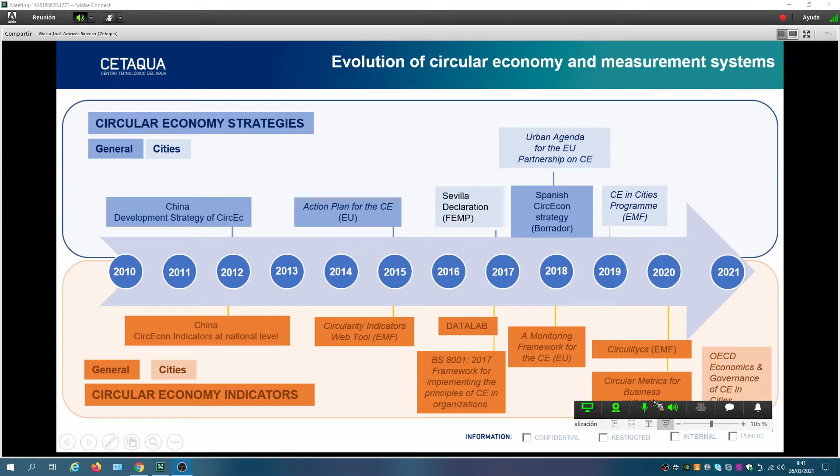And regarding indicators, there are several initiatives. We have done a very exhaustive review of the other indicators worldwide regarding circular economy indicators and tools from the Ellen MacArthur Foundation, from the China strategies, from the European monitoring frameworks, and others like the circular metrics to evaluate the cities in the context of the circular economy.

So regarding the principles and strategies, I think that everyone knows them, but I would like to refresh something about eco-design, which is very important in products to avoid design waste and pollution. Important also is all the procedure and the final management to valorize this waste and to introduce it in the cascade to try to impulse the circularity in all the processes.

So the three main topics are to design out waste and pollution, trying to optimize the amount of energy, minerals, and also the consumptive use of water; to keep products and materials in use, with the idea to optimize the energy, the resource extraction, and the value generated in all the systems, including the water systems and others connected with them; and to regenerate the natural systems.

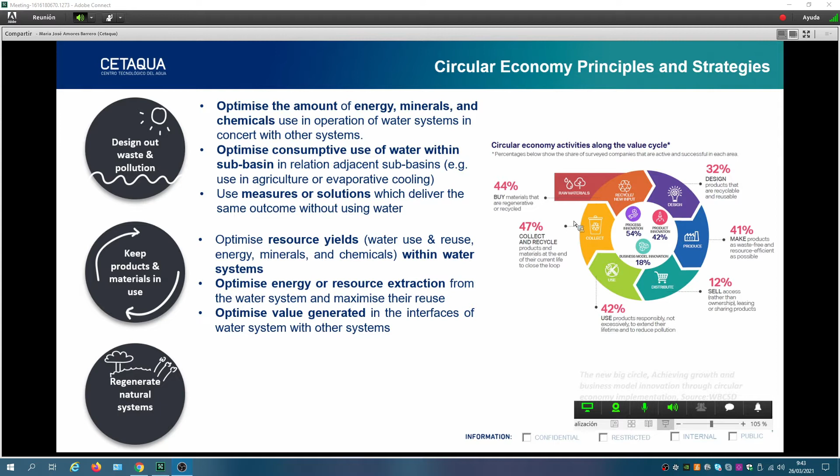Okay, regarding the context of water, energy, and waste, we have different circular challenges from the European Union impulsion. We need to promote water reuse as a safe and economic alternative to the wastewater flows. Regarding energy, we need to promote green energy, promoting the reduction of greenhouse gas emissions, and also to obtain climate neutrality.

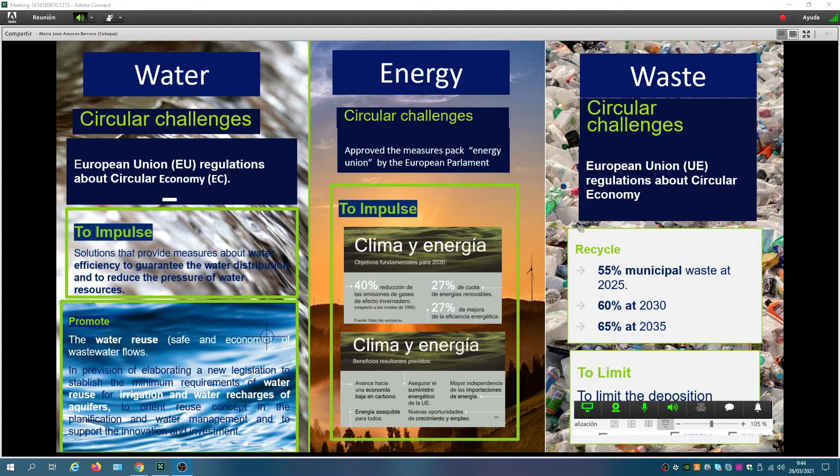And regarding waste, we need to promote the 7 R's: recycle, resources, restoration. So all different options of valorization, to try to improve recycling up to 65% in 2035, and to limit the deposit of waste to landfill.

So with this context, Cetaqua has established a definition of circular economy model processes, not only for cities but also for organizations, to implement circular economy models taking into account three flows: water, energy, and waste assessment.

First of all, when we start these kinds of studies, we need to identify the different key actors in the regions. Also, we need to perform this flow analysis, through different interviews and workshops, to obtain and collect all the information regarding data: water balances, input and output, the energy consumption and generation, and also the waste and its management. So when we have all the information about the key actors we want to include in the assessment, we use big data and other assessment technologies.

We provide different mappings of circular economy opportunities, and for each one we promote a strategic agenda, with an action plan for each one, taking into account the viability of the technology, but also the environmental, economic, and social viability and impacts that each circularity we propose has in the context of the territory.

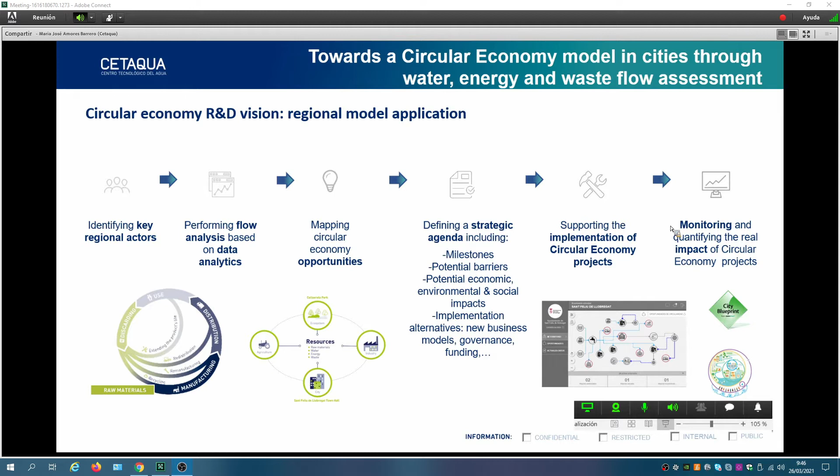So regarding the concept of the circular economy in the urban water cycle, from Agua de Barcelona and Suez, we are promoting the concept of converting the typical, conventional wastewater treatment plant into a biofactory. The concept of the biofactory is to promote the three zeros, applying the circular economy concept to produce energy self-sufficiency through biodigestion in the wastewater treatment plants, for the biofactory but also for the companies and organizations that may be close to the biofactory in an industrial area. Also, we want to promote the concept of water, of course, regarding the wastewater.

The 100% of the recycling of wastewater through the reclaimed water for non-potable uses, maybe for irrigation, for recharging the aquifers, or for cleaning, or for the refrigeration towers, or other non-potable uses.

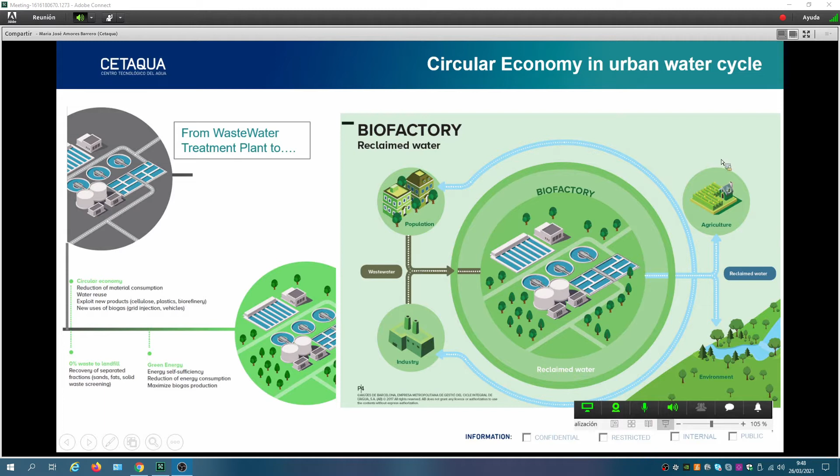And finally, the other concept is the waste, to promoting zero waste to landfill and to valorize and extract some nutrients from the water lines, about some chemicals, about nitrogen, phosphorus, and other parameters that we can apply in agriculture. So this is regarding the context.

We are now moving to the circular economy models in Barcelona metropolitan area. I am explaining two specific case studies that we have finished, and in some of them we are continuing implementing the circularity in each region. These two municipalities are in Catalonia, in the metropolitan area: Sant Feliu de Llobregat and Gavà.

In both projects, we have implemented circular economy implementation guidelines applying the circularity, and we have obtained from 2016 and 2017, in both case studies, a pack of circular opportunities with more than 20 circularities. The methodology is split up in three steps.

As I mentioned before, in the methodology application, we have defined the key actors from the primary sector. We have included the agricultural park. This is a specific organism that is supra-municipal, that is in contact with different municipalities. This is a very good promoter of the circularity in a region, a very good actor.

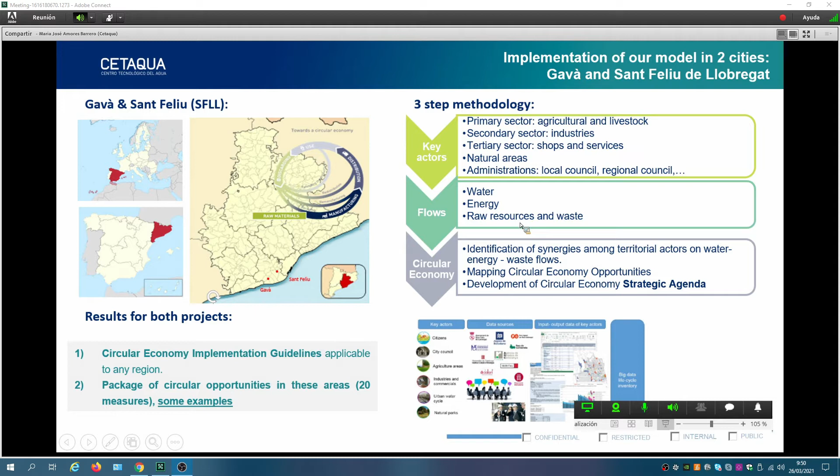Then the secondary sector from industry, very important in both cases, including the cross-sectorial industries in each industrial area, but also the tertiary sector, more for the urban context. The natural areas in both cases, the two parks, the Collserola Park and the Garraf Park, and also, of course, the administration, the local councils and the regional, because they are the dynamic part in the context of the project. We have included different flows, and we have identified different strategic agendas.

This is regarding the reclaimed water for non-potable uses for cleaning, for irrigation in the municipality. Other initiatives regard increasing the self-produced energy based on the industrial sludge biomass, and promoting an agro-industrial cooperative among others, and of course, in the case of the organizations, the extension of the life cycle of the industrial waste.

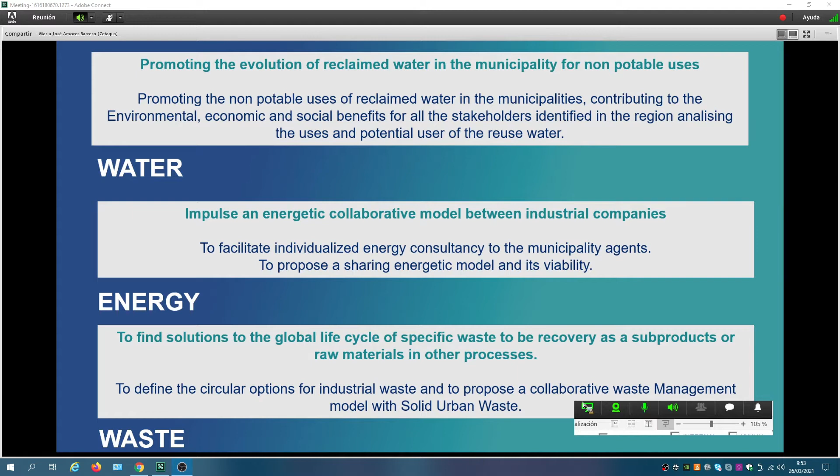And regarding waste, to find some solutions to the global life cycle of specific waste, to be recovered as subproducts or raw materials, or others, promoting some collaborative models, including the industrial solid waste that is assimilable to the urban solid waste from the municipality.

So regarding the reuse of water for non-drinking uses, in the case of Sant Feliu, they provide some part of the blue infrastructure from the double reclaimed water infrastructure. And we have done the study to facilitate the wastewater treatment plant that is in contact with the industrial area, to promote this reclaimed water for watering the public parks, or for cleaning the streets, or maybe for other non-potable uses like the refrigeration towers.

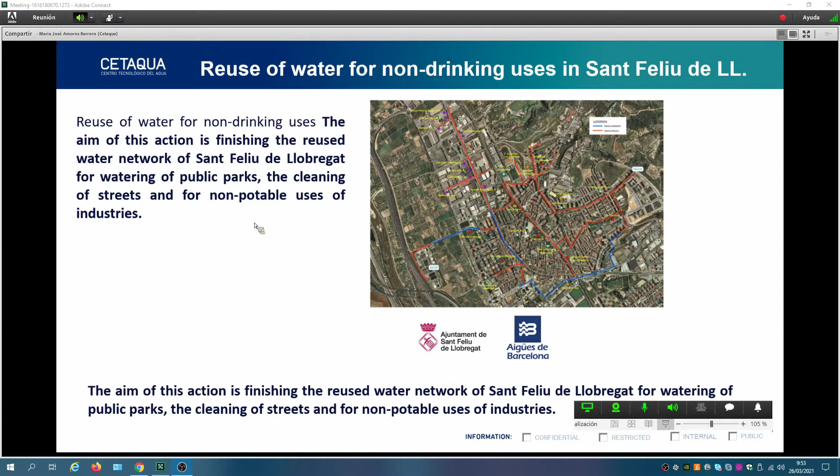In the case of Gavà, we have implemented a water consumption analysis and estimation of the potential demand.

The wastewater treatment plant is here. It's more far away than in the case of Sant Feliu, but we are studying the construction of some infrastructures, and also the potential demand, to provide the maximum potential that the wastewater treatment plant can provide to the industrial users or other users, like, for example, the agricultural park.

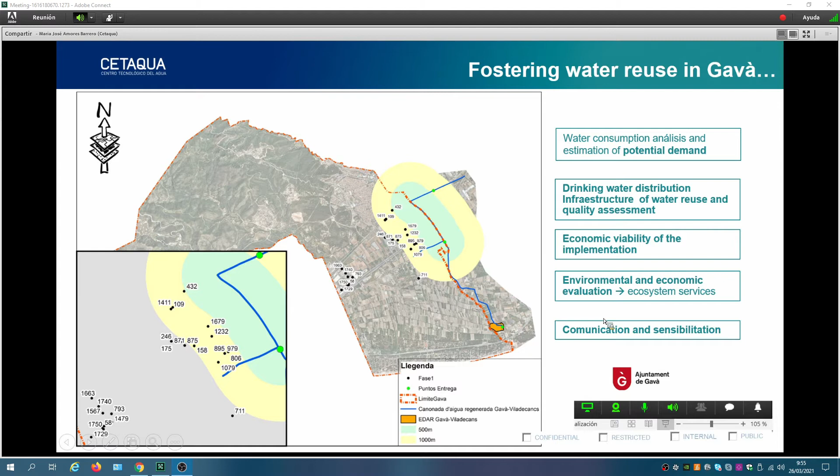And then we have done also, in the context of the implementation of this opportunity, the economic viability and quality, and also the environmental point of view of this measure, taking into account the ecosystem services, and also the water quality that all the potential users need for their uses. And also we have done different actions of communication and sensitization about the water reuse.

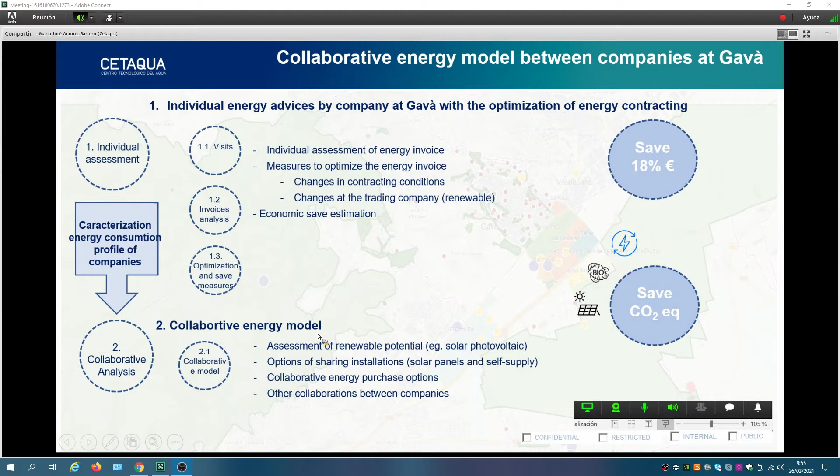So regarding the collaborative energy model that I mentioned, first we have done the characterization of the energy consumption profile for each company that wants to participate in the project, with a saving of almost 18% in the invoices of energy consumption. And we are now constructing a collaborative energy model in the huge industrial area in Gavà.

So regarding the waste, we have implemented the individual measures that are specific for each industry. More or less 20 industries have participated in the project, and we have helped the users to find the best circular option for their specific waste that is now managed to landfill, but this is not the best option.

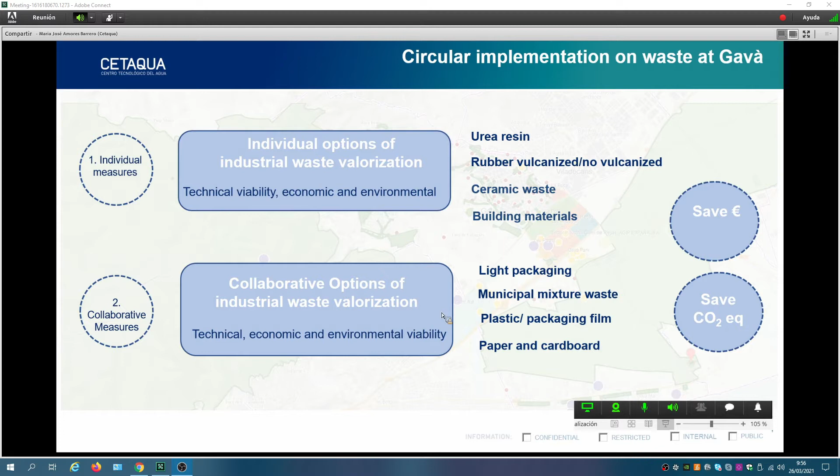And we are doing collaborative options of industrial waste valorization, taking into account green points, and in collaboration with the urban part of the waste, and taking into account some technical, economic, and environmental points of view to include this global management of the solid waste resources that are in the context of the municipality.

So regarding some circular and sustainability indicators, like, for example, life cycle assessment, carbon and water footprint, we have included also in these municipalities some circular indicators like the Water-Wise Cities, where Gavà is the first city in Spain that obtained this distinction, which takes into account only water: the water sensitivity, the data transparency, the water-wise communication, and also the regenerative water service.

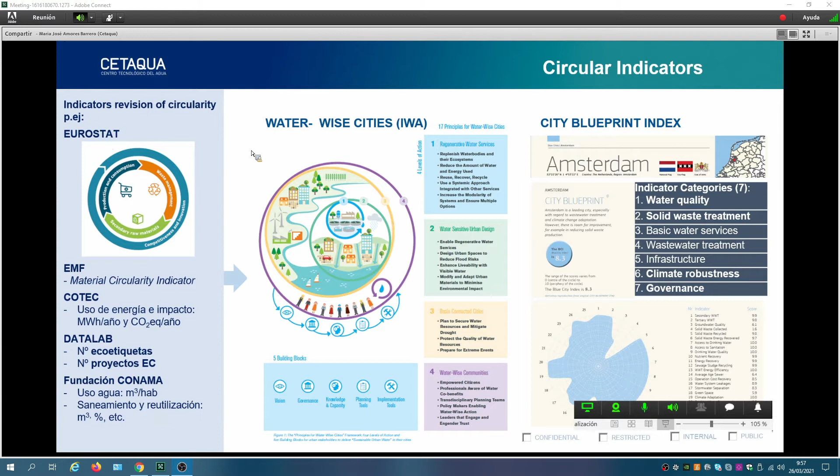And also we have applied the City Blueprint Index, an index provided by KWR from Holland. But also in the context of Cetaqua, we have elaborated some indicator revisions of all the data and scientific articles to provide 25 circular indicators to be applied in the municipalities.

And also we have done some experimental work, and this is very important, on the direct greenhouse gas emissions. We are now doing some monitoring campaigns to obtain some specific factors.

So regarding life cycle thinking, if you don't know the tool of the Life Aquaenvec, this is a free tool that is available as a result of the Life project. But also we have been applying different initiatives in the context of the urban environment, and also in the urban water cycle, regarding the life cycle assessment concept, the life cycle costing, the social life cycle assessment, taking into account the guidelines of the social life cycle, and also other initiatives derived from life cycle thinking, like eco-efficiency and the water footprint.

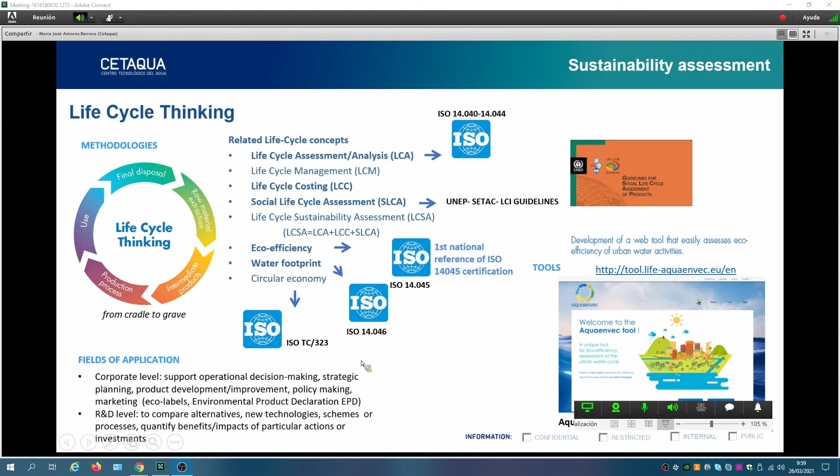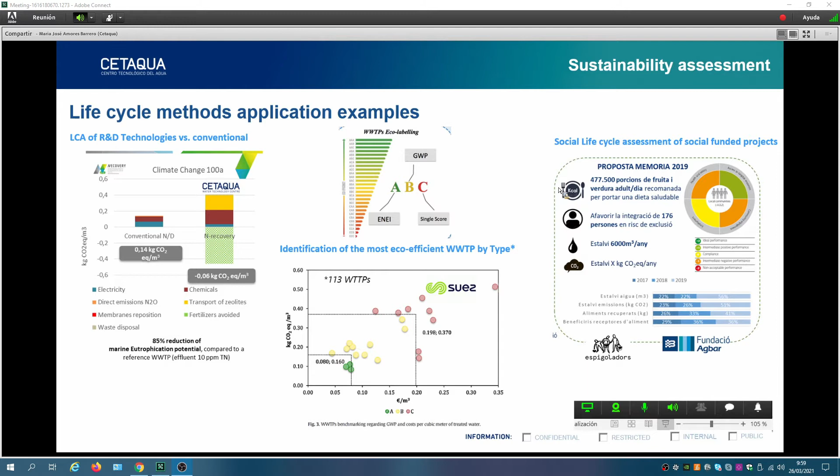From the life cycle methods application, there are some examples that we have done for almost all the wastewater treatment plants of our company. We have obtained different eco-labelings, different eco-efficiency assessments to include the global warming potential, but also the water footprint. And we have applied the social life cycle assessment in the context of the vulnerability of the different actions from a social point of view.

Some conclusions to finish my presentation. So these kinds of studies have a huge added value in the cities and in the organizations that apply them: in the context of the city council, inter-area collaboration between all the departments or local administrations in the municipality; some collaborations with other autonomous and regional entities; but also some public and private collaborations to co-create the circularity models, taking into account digitalization, disruptive technologies, and other assessment and monitoring of circular opportunities.

So some of these challenges are that we will need to extend this collaboration spirit to all parties involved in the water, energy, and waste governance models, not only from one part. In the context of the urban water cycle, maybe this is the promoter, but all the actors need to be part of this concept. And we need to transfer this concept for metropolitan areas to be in context and align with the circular economy plan actions from Europe.

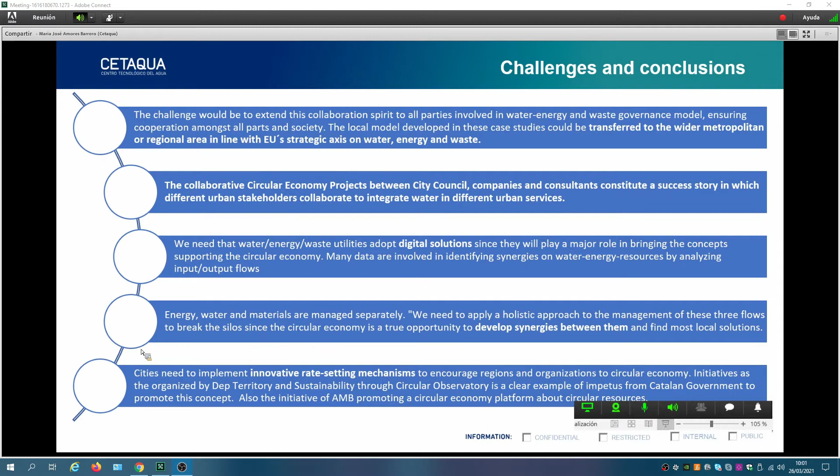We need to collaborate in the circular economy projects between the city council, because it's a very good synergy, taking into account the companies, the consultants, and in this direction. Digital solutions are mandatory to establish these assessments and these opportunities to assess all this data and transparent data, that is open data in the municipalities. And we need to promote renewable energies to obtain the synergies between them from local solutions. And so the cities need to implement some innovative rate setting mechanisms to encourage the regions and organizations to be circular. This is all.

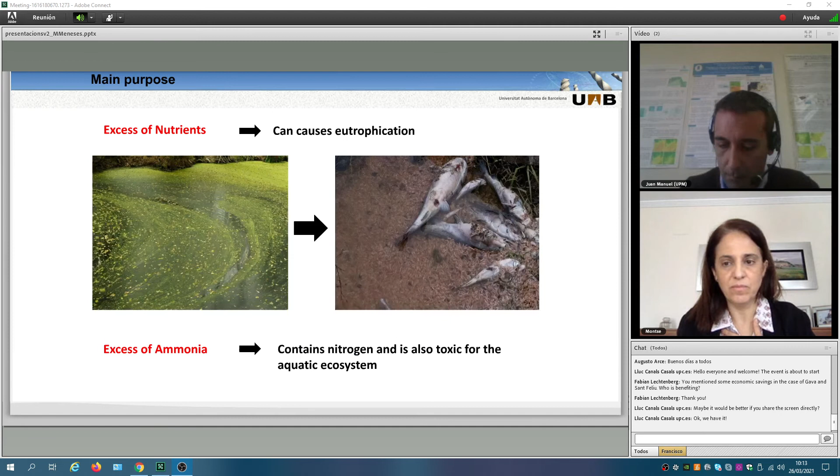Microphone, Montse. We don't hear you. Hello, can you hear me now? Okay, now it's fine. I'm trying to share the presentation. Can you see the presentation? Not at the moment, Montse. Stop the chat, and I put presentation. Okay, it's okay. I don't know, but there is something missing in this slide. Maybe if you share your screen, you know what you're seeing, then it will do. Okay, now?

Okay. Thank you. First of all, I'm very glad to be here because it is a pleasure for me to present and share with you the study titled Integration of Environmental and Economic Aspects to Wastewater Treatment Plant Control Actions Evaluation. Thank you very much to the organization for the invitation to the International Conference on Water and Sustainability. Thank you.

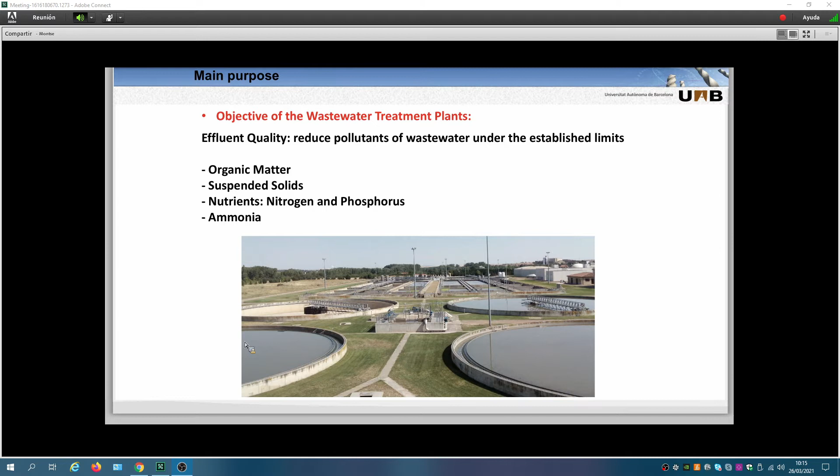Large amounts of fresh water are used daily around the world, becoming wastewater. This wastewater must be treated to avoid contamination of the receiving water, rivers or lakes, which could affect aquatic life and consequently biodiversity. Due to this, wastewater treatment plants are necessary to maintain the required level of water quality. Some of the pollutants are reduced to low levels by the default wastewater treatment plant structure without applying any automatic control. However, other pollutants are more difficult to reduce.

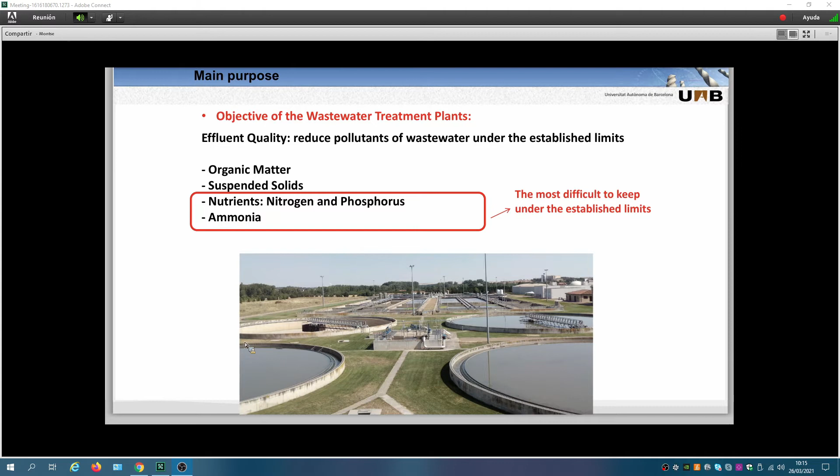For this reason, and also to restrict operational costs, the application of control engineering in wastewater treatment plants is playing an important role in research in recent years. Specifically, maximum concentration limits are established to discharge in the receiving environment. Nitrogen and phosphorus are nutrients that can cause eutrophication in the receiving water and consequently the death of aquatic beings. Precisely, keeping total nitrogen or ammonium nitrogen concentration below the limits is usually one of the most difficult objectives to fulfill in wastewater treatment plants. In order to achieve all those targets, the application of operation strategies in wastewater treatment plants is very common.

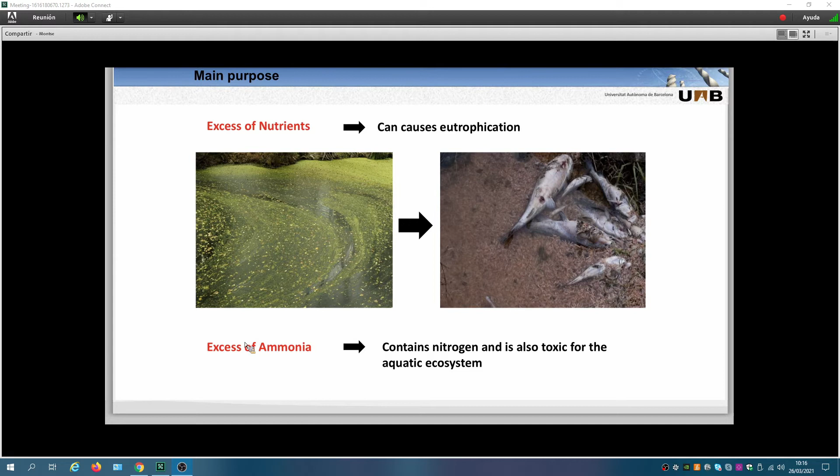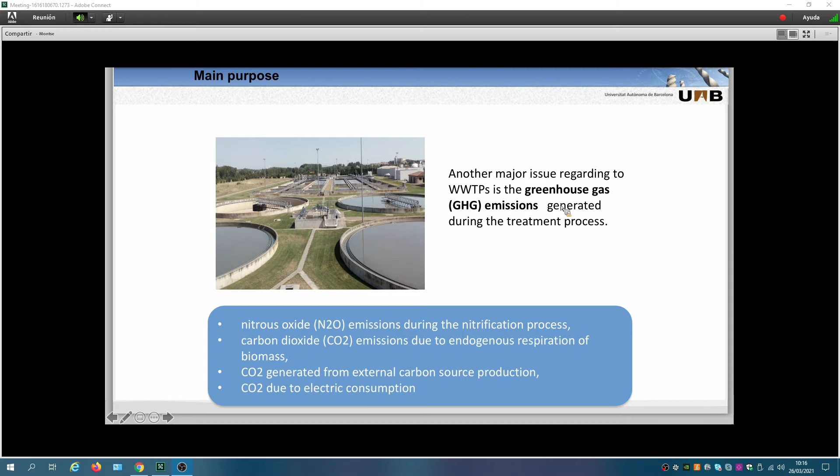Another major issue regarding wastewater treatment plants is the greenhouse gas emissions generated during the treatment process. Actually, greenhouse gases are important in maintaining the proper temperature for life on Earth, since they retain part of the infrared radiation reflected from the surface. The problem is that the increase in greenhouse gas emissions generated by the industrialized world is creating global climate change. The optimization of the wastewater treatment plant is a difficult task, as is the achievement of eco-efficiency targets when running a wastewater treatment plant.

Regarding the implementation of technology solutions based on the optimization of control system performance, the challenges faced by control system design rely on the complexity of biological processes, the dynamic effect of temperature, influent variables and interactions between the different units. Moreover, the influent load exhibits fluctuations associated with human activities in the catchment or rainfall, in the case of combined sewer systems, and seasonal effects due to temperature and influent flow rate variations. These complex systems should be operated and controlled considering plant-wide effects, addressing the interaction between the different subsystems and the multi-objective nature of the problem to consider eco-efficiency targets.

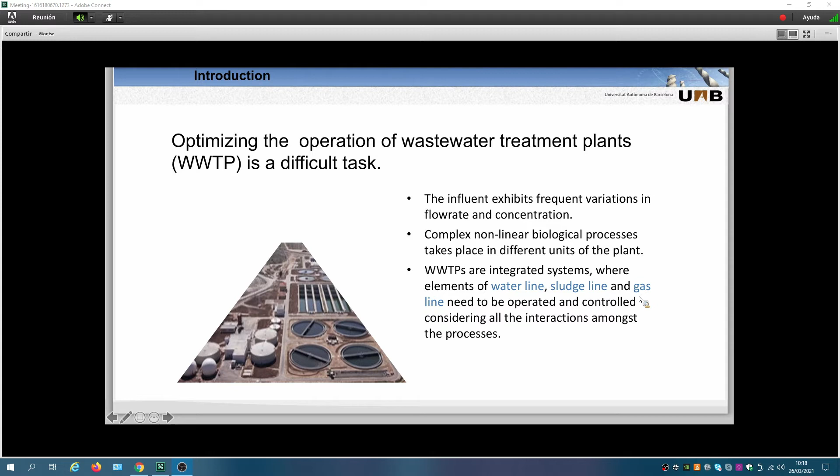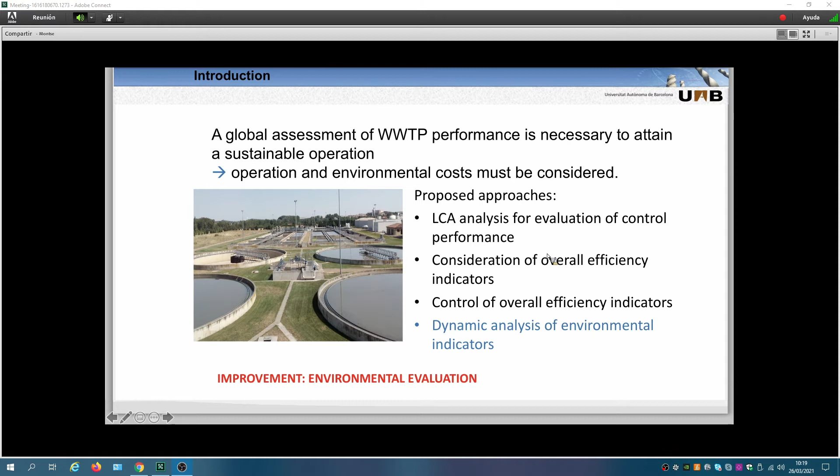This is what drives the intention of this work, by proposing to complement the existing water quality measures in terms of pollutants with analysis of potential impacts that can be performed. This is to be accomplished by using the environmental tool for assessing the environmental performance, the Lifecycle Analysis. Lifecycle Analysis provides a wide and more complex perspective. With the introduction of this new axis, a complementary view on the effect of the plant operation will prove to be useful in order to decide the most appropriate way of operating the wastewater treatment plant.

So, although there is a large number of works that apply control strategies in wastewater treatment plants, the evaluation of greenhouse gas emissions and the integration with the economical aspect has emerged in recent years. We can say that some steps have been made in this direction, but there is still the need to go in this direction of numerical, quantitative, integrated assessment that trades off the different aspects and evaluation criteria: effluent quality, economical cost, and greenhouse gas emissions.

The idea is to show how important it is to integrate the economic and environmental aspects at the same time into the evaluation. Because of that, the objective is to analyze the behavior of some of the most typical control actions used to build up plant operation control strategies, taking into consideration all the above mentioned aspects. In this context, to introduce an integral indicator that allows a global quantitative evaluation of control strategies in wastewater treatment plants.

So the objective is to define eco-efficiency targets based on the environmental and economical integration to the evaluation of wastewater treatment plant control strategies. So our assessment combines plant performance evaluation criteria, such as effluent quality and operational cost defined by a benchmark simulation model, jointly with a detailed environmental evaluation per impact category provided by Lifecycle Analysis.

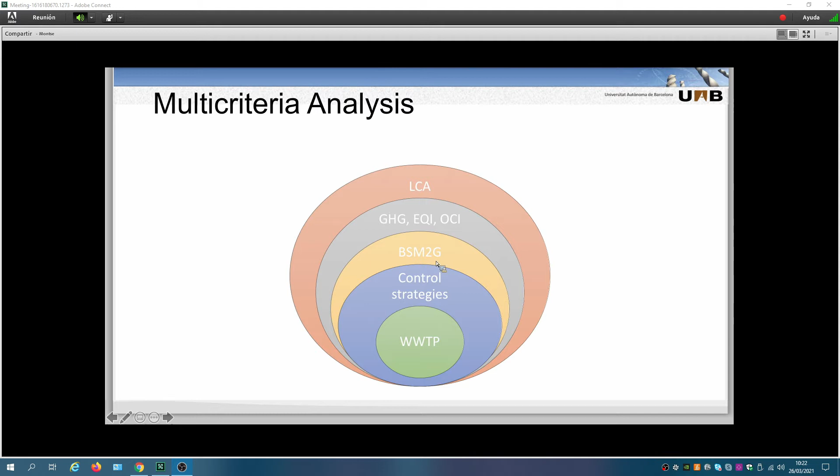The joint analysis to be conducted aims to get a clear and clever answer regarding the choice of the appropriate control strategy. Of course, the selection will depend on the end user preference, but having both perspectives will definitely add a wider understanding and explanation for the choice of one control strategy in front of the rest. A benchmark simulation model is used for evaluation of the proposed control strategies, as is common practice in wastewater treatment plant research. The one that we are going to use is the BSM2G, which is an extension of the BSM2, but with the inclusion of the greenhouse gas emissions.

A wastewater treatment plant is a very complex process that encompasses biological, transport, and hydraulic phenomena, among others. There is also a considerable range of plant layouts. All those factors make it difficult to propose control and operation alternatives, and in particular complicate their evaluation and comparison. With the aim of solving this problem, the benchmark simulation model was developed. The benchmark is a simulation environment defining a plant layout, a simulation model, an influent load, test procedures, and evaluation criteria.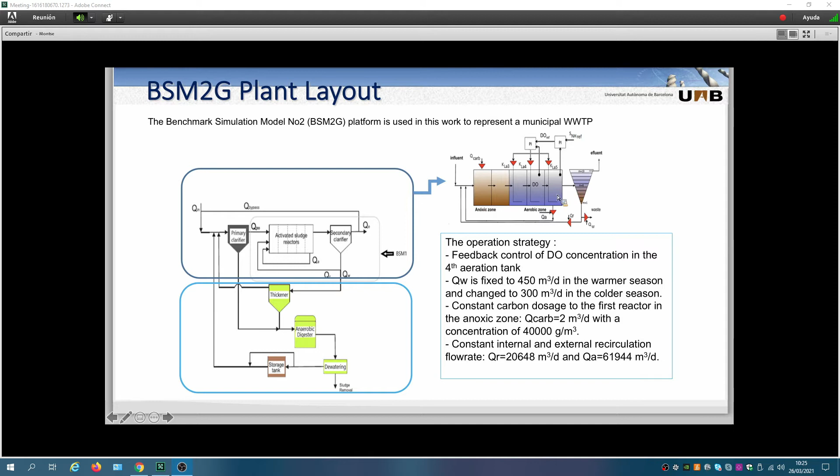The performance evaluation of the plant is done with the benchmark by considering the integral performance assessment of the whole plant regarding the effluent quality, the operational cost, and the greenhouse gas emissions. The effluent quality index is related to the fines paid due to the discharge of pollutants into the receiving water.

The effluent quality index is expressed in kilograms of pollutant per day and is calculated weighting the effluent concentration of the different pollutants according to this expression.

The second criteria, the economic cost for operating the BSM2G simulation, is expressed using the operational cost index, taking into account the aeration energy, the pumping energy, the sludge production, the consumption of external carbon, the mixing energy, the methane production.

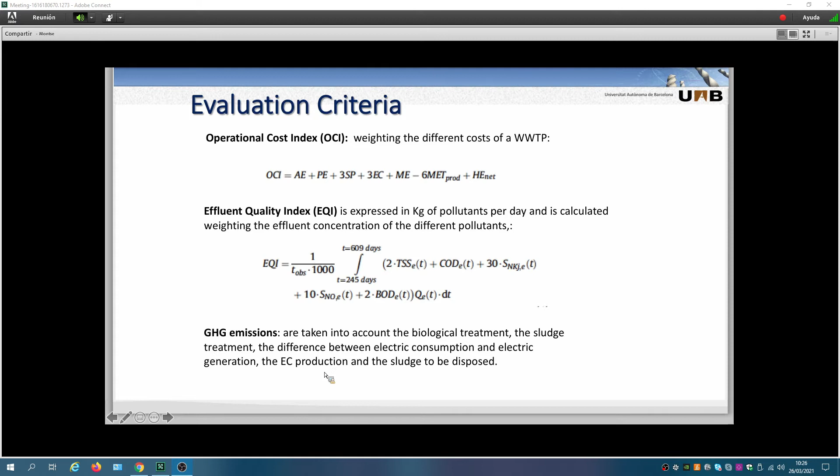And for us, the last criteria, the total greenhouse gas emissions production, is computed according to the method proposed by the BSM2G and includes the biological treatment, the sludge treatment, the difference between electric consumption and electric generation, and the sludge to be disposed.

So, in this slide, we present the control actions that we have studied. In the BSM2G, there is a default closed-loop control strategy defined. This is used as a reference for studying the performance of alternative control strategies proposed by the users. The default is the first one.

This default closed-loop control strategy consists of controlling the dissolved oxygen concentration in the 4th tank, manipulating the oxygen transfer coefficient. For this system study, different control actions have been considered and applied individually or grouped that will allow us to evaluate their impact on the functioning of the plant in terms of the operating economical cost, the effluent quality, and the greenhouse gas emissions.

The definition of those control actions starts from an inventory of the main measured variables of interest in the plant, and the possible control variables that can be used to influence them. Then you can find here a summary of the different actions considered. The first one is the default one. Then we can find the control of the dissolved oxygen, the control of the nitrate concentration in the last anoxic tank. Okay, you have here a summary.

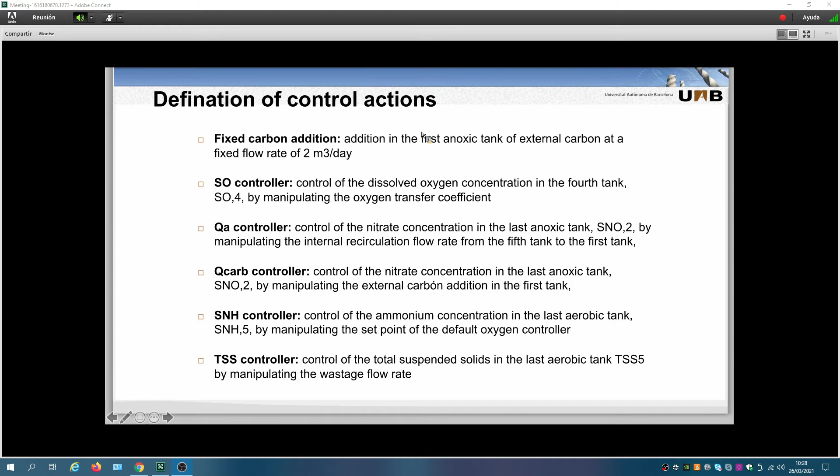The control strategies are defined by combining these control actions in order to allow the assessment of the individual actions, but also the influence between them. When we get the results from the BSM2G simulation model, we get for all the strategies the different values of the different criteria. But we present here the results for the three criteria for all the strategies studied.

An evaluation of the strategies pointed out a very large variation of the results concerning the three considered indicators. Each one of the strategies shows very good results in one of the indicators, but they have a different impact on the other indicators. According to these results, it is difficult to conclude the most appropriate control strategy, as each provides an advantage, but neither is clearly better than the other. Because of that, a more complete evaluation is required in order to select the most suitable control.

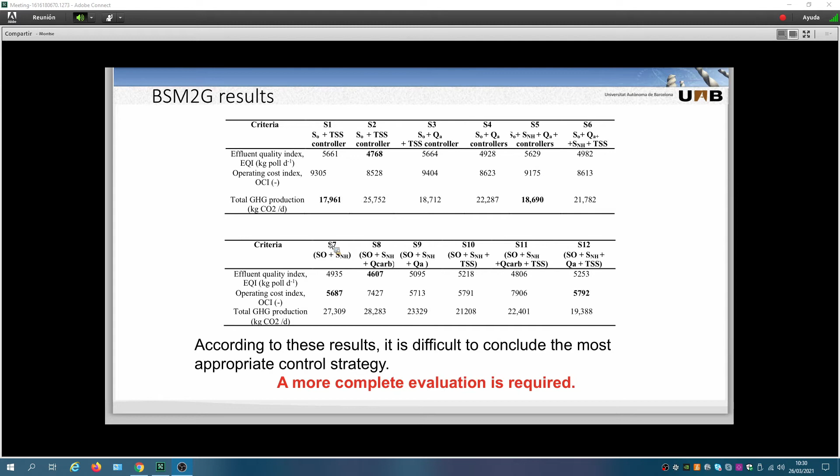Thus, it results in the necessity to use a global indicator in order to obtain a more holistic view regarding the performance of the control strategies as a whole. In that circumstance, it is proposed here to use a global numerical analysis to consider the influence of the adopted strategies on all three indicators, and to see also how the introduction of the greenhouse gas emissions has repercussions on the performance of the control strategies.

In order to achieve this, firstly, a scaling operation is performed for the three indicators to bring them to compatible values. Thus, the indicators' values are scaled with respect to the maximum value. Next, the following two indicators are defined for the evaluation of the implemented control strategies. The first one only takes into account the water quality and the operational cost of the plant. And the second one also takes into account the information regarding the greenhouse gas emissions.

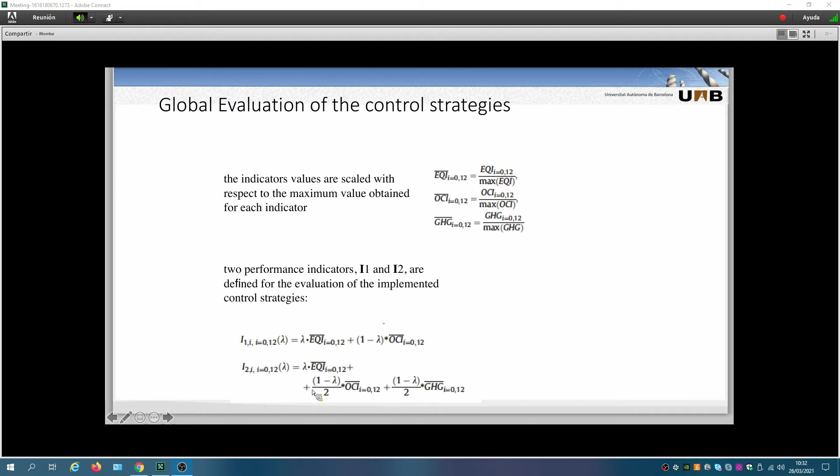The lambda factor serves to weight the terms included in the indicators, giving a smaller or larger importance to each of them. The way the two indicators were defined is related to the fact that the main aspect in a wastewater treatment plant is the effluent quality, and the second part of the evaluation concerns the cost expressed purely in economic terms in the first indicator, or the economical and global environmental impact, the greenhouse gas emissions, in the second indicator. At the end, the environmental impact is a cost to be paid for operating the plant. This is why in the second indicator, the lambda factors enter in the same way as the operational cost index.

A graphical representation of how the best control strategies change depending on the adopted criteria and on the weighting factor lambda is shown here. Here you have represented the control strategy that presents the best results of the global indicator, depending on the lambda value. So it's the best control strategy depending on the value of lambda.

Note that strategy 8, the one that shows the best results on water quality, is the best strategy in both indicators when lambda is close to 1, so when effluent quality has the largest share in the criteria. But if lambda approaches 0, in this part, the best strategies change. This time it is different in relation to criteria 1 or criteria 2.

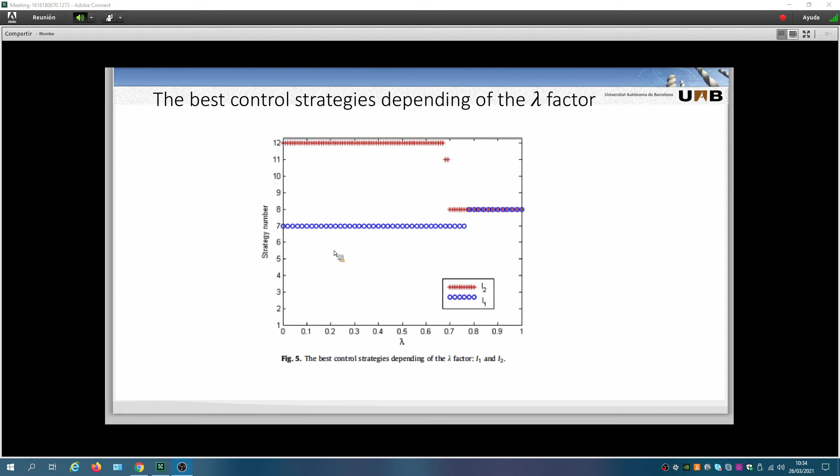The advantage of using these global indicators is that they provide information in accordance with the user interest in the adopted strategies. The disadvantage is that in this way we have only one image of one of the indicators, which is defined by the selected lambda value. Because of that, a more appropriate way is to represent the evolution of the indicator in relation to the change of the lambda factor within the range.

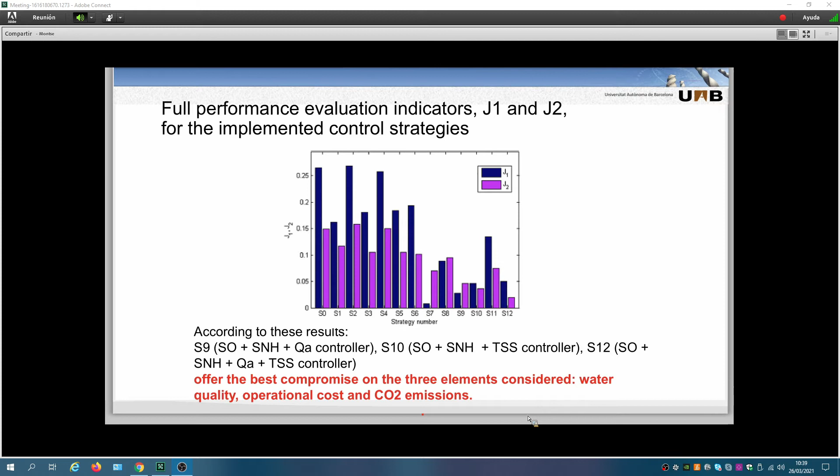So, because of that, the objective of this research is to evaluate the environmental plant performance under different scenarios and to compare them in order to select the most suitable strategy based on multiple evaluation criteria. It means to consider in the control strategy the criteria that the benchmark provides and the indicators for the life cycle analysis.

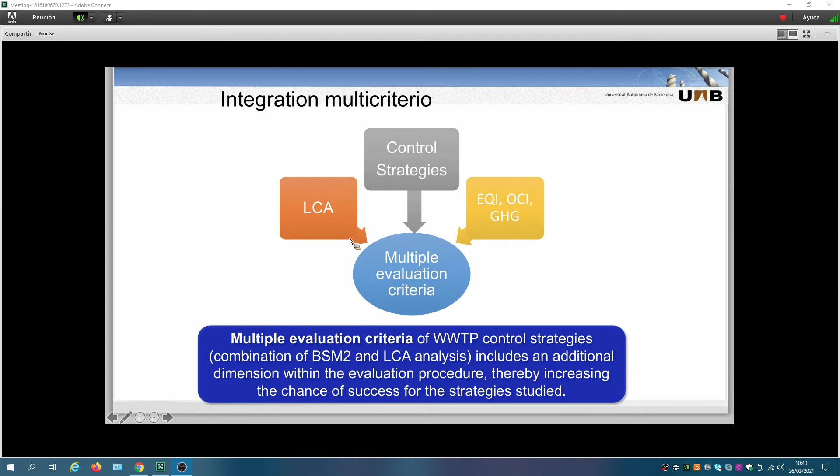The philosophy used in the life cycle methodology is the concept of life cycle thinking. Life cycle thinking means the environmental attention is expanded from the specific production site to the whole product life cycle, including the supply chains. Life cycle analysis is a technique to assess the potential impact associated with a product or process during the whole of its life cycle, and involves the following steps: the definition of the goal and scope, the inventory analysis, and the impact assessment.

How are we going to do this kind of evaluation? We are going to evaluate all the steps of the production: how you get the material, how you produce the material used and the product, how the product is used, how the distribution is realized, and what is the final life of the product. For each one of these steps, we are going to evaluate all the inputs and outputs, and then we will have the inventory of the product.

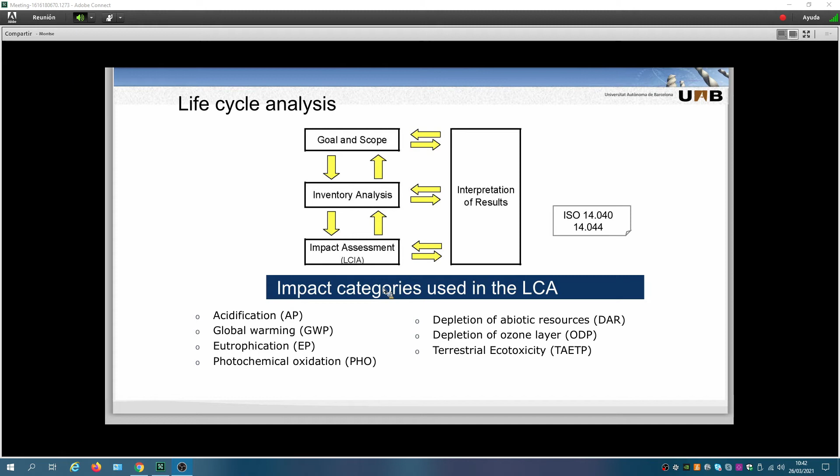One of the crucial points of the lifecycle analysis application is the appropriate inventory definition. The inventory phase is the core of the lifecycle analysis and is the most time-consuming part. After that, we will evaluate the different environmental impacts, such as global warming or acidification. The main objective of this lifecycle analysis study is to analyze the environmental profile of the control strategies implemented in the BSM2G simulation in order to compare them by also introducing the environmental perspective.

A key point in the lifecycle analysis is to define the product unit, the functional unit. Here, the functional unit was 1 cubic meter of wastewater treated. For the system boundary, the operational phase has been considered, and we have excluded the construction of the wastewater treatment plant, the sewer system, and the transportation of wastewater. The construction phase has been excluded from the system boundary because the plant usage is the same for all the control strategies studied. The sludge production is contemplated here for use in agriculture as fertilizer.

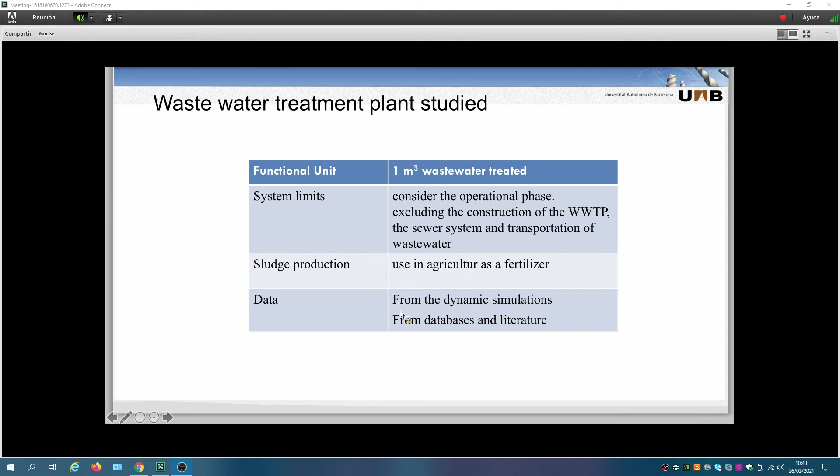Out of all the implemented control actions, those based on the control of nitrates in the second anoxic tank using internal recirculation flow rate and control of the suspended solids concentration in the fifth tank using waste flow offer the best compromise on the three elements considered in the evaluation. We see in this section how taking into consideration the life cycle analysis results allows one to go one step further, to refine such categorization and to choose the best available option from the environmental point of view.

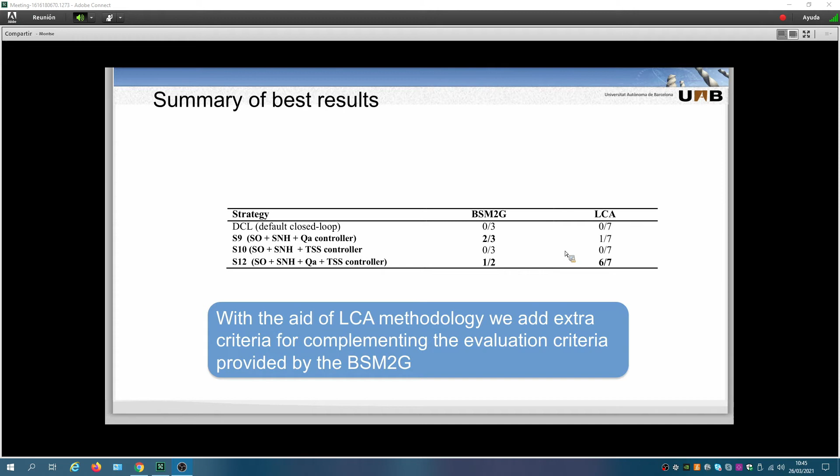So this research presents the effect of the main control actions used in wastewater treatment plants regarding the 3 usual indicators used for performance evaluation: water quality, operational costs, and greenhouse gas emissions, and also proposes an integral indicator for performance evaluation able to take into account all aspects mentioned in the plant assessment. The reported results emphasize the importance and usefulness of using multiple evaluation criteria to compare and evaluate control strategies in a wastewater treatment plant for more informed operational decision making.

Multiple evaluation criteria of wastewater treatment plant control strategies include an additional dimension within the evaluation procedure. Because of this, it can be concluded that consideration of life cycle analysis criteria provides an additional criterion allowing for better environmental evaluation of control strategies in wastewater treatment plants.

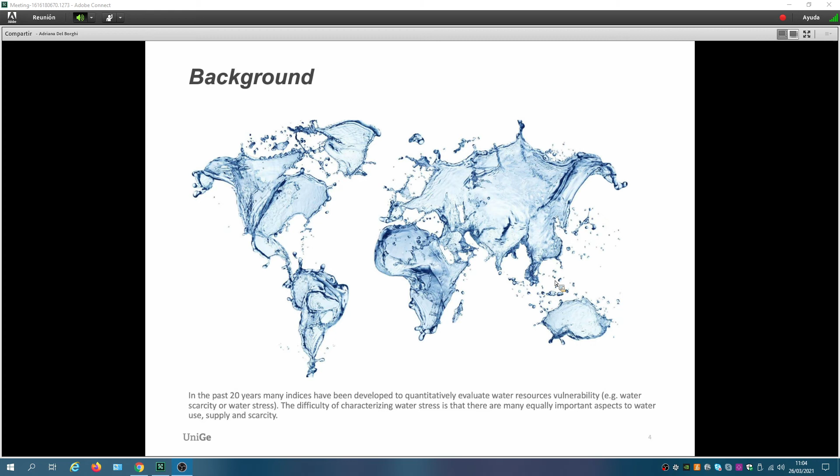As known, there are several methods in which water scarcity and water stress are measured at international level. There are many indices which are developed and which can help us to measure water use, water supply, and water scarcity. But it's not very easy for companies to understand which method is the best one, and how to make the interpretation of indices, which are very difficult to be understood also for scientists and for researchers working in that field.

Just to make a brief recap on existing indices, over the last 20 years several water scarcity indexes have been developed, starting from indexes based on human water requirements, from the human need towards water resource vulnerabilities, moving to the ecosystem, and then indexes incorporating environmental water requirements and also the condition of ecosystems maintaining sustainable levels of water availability.

So we can see that the definition of indexes concerning water follows the same rationale of the sustainability definition, starting from human needs to a more comprehensive, sustainable point of view. In order to measure these indexes, the most known is the measurement of the virtual water content, which can be based, of course, on life cycle assessment studies, in order to understand that we can see just a very small part of the water impact of food products if we do not consider all the hidden impact of the supply chain.

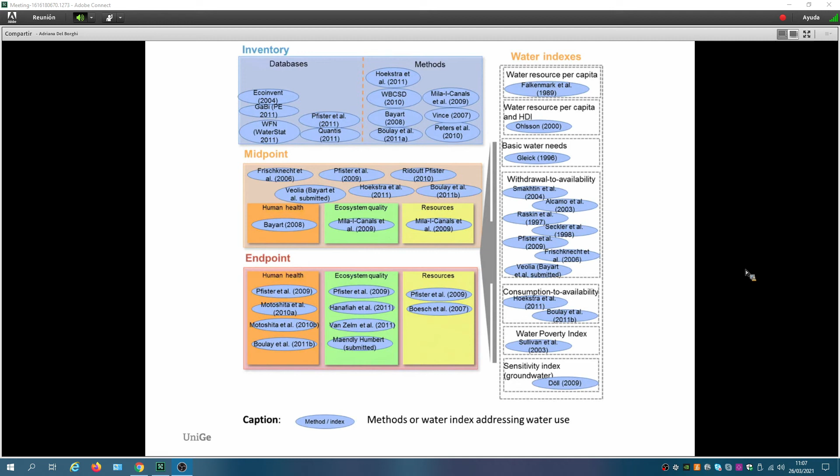So that's why we tried to understand how to weight and normalize standard greenhouse gas life cycle assessment results in order to assess a unique indicator based on the water energy food nexus concept, in order to understand that all of these indicators, as we consider food as well, are connected, as of course we cannot focus just on water availability and water stress indexes.

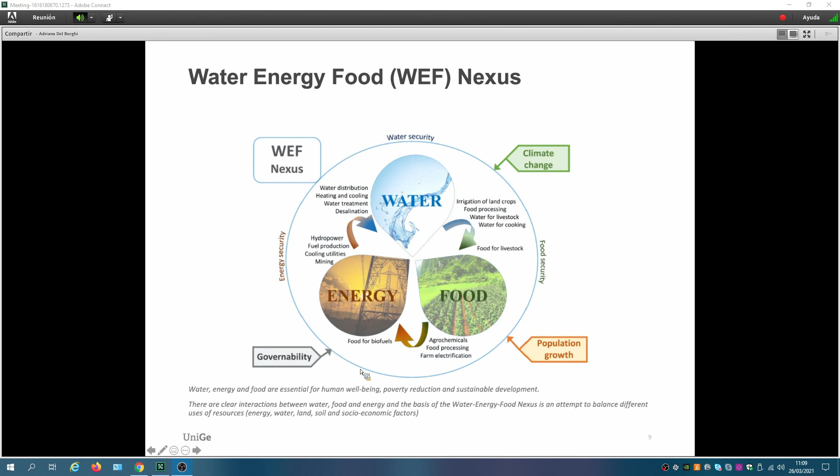For example, if we consider that water can be produced through seawater desalination, it's clear that this process can solve the problem of water scarcity in basins and lakes, but seawater desalination has a very high energy consumption within this process. And related to the energy consumption, we'll have, of course, greenhouse gas emissions. So we'll have to balance these three indicators in order to understand all the interconnections within these indicators and this impact as well.

So that's why we decided to perform this research and this study in order to define a unique indicator to help companies define industrial strategies for reducing their water footprint, but also their impact, in a comprehensive way. And again, we decided to follow the pathway towards the WEF indicator.

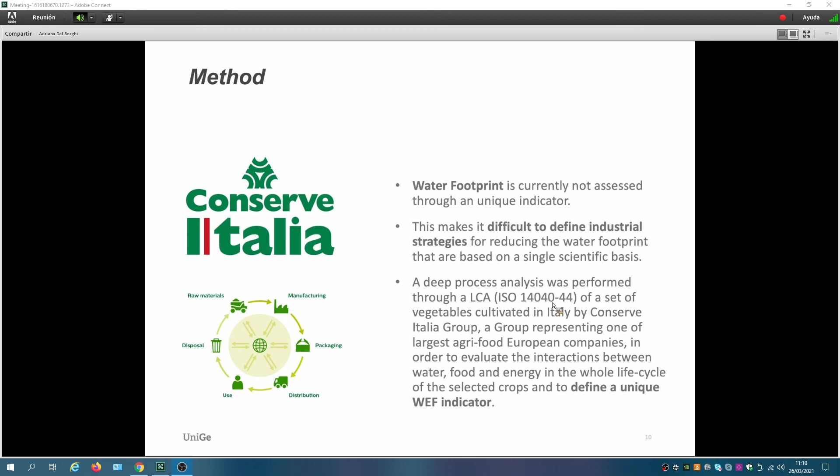So we performed a life cycle assessment according to ISO 14044, and we assessed water scarcity according to ISO 14046, and we focused basically on 5 crops considered strategic for the companies, both for volume produced and volume sold by the company, but also strategic from water consumption and water scarcity issues. This is the geographic area that has been considered and included in the study.

Of course, as our territory extends from north to south, we have very different climatic areas, in particular from north to south Italy. In Apulia we have a specific situation of not just desertification, but water scarcity is very high in the south of Italy. So that's why we have different geographic areas, and we developed specific indicators considering these 3 geographic areas.

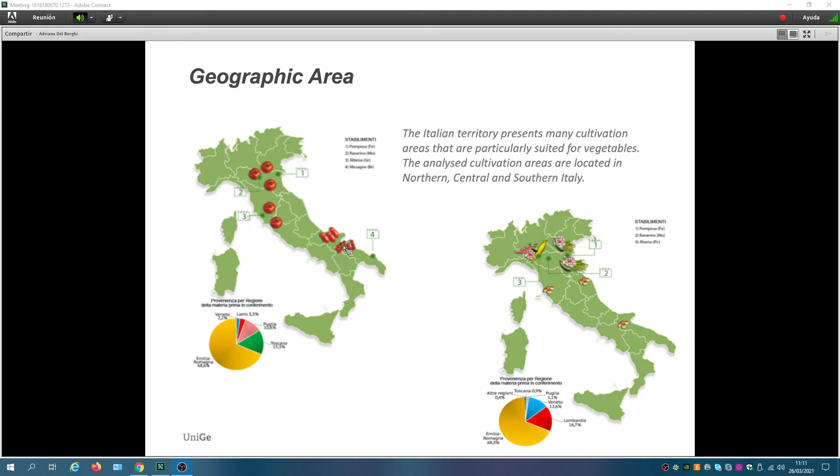After selecting the crops, we decided to perform a SWOT analysis in order to understand which can be the strengths, weaknesses, opportunities, and threats for each crop, considering their water need, the opportunities and feasibility of management improvements, and how they were strategic for the company.

And after this analysis, we decided to focus our research on beans, on tomato, and on sweet corn for different reasons. For example, beans resulted in being the most water demanding crop per mass unit, but tomato, due to the high production rate within the company, resulted in being the most water demanding crop in terms of overall agricultural production, according to the production rate and overall production strategies of the company.

As well, sweet corn has a very high specific water consumption due to the need for its cultivation and for the overall production. So we decided to focus on these three crops.

As said, we considered 3 geographic areas. We involved 115 farms, almost 2,000 hectares, and we performed a 2-year campaign collecting data specifically for each crop and focusing on their different irrigation systems: gravity, including flooding, lateral infiltration, sprinklers. We collected several data on hose reel or pivot irrigation, while we considered drip irrigation.

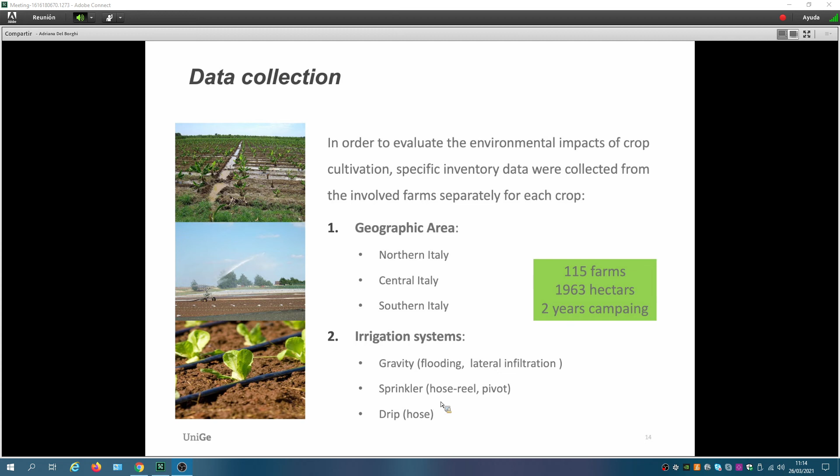We performed, within the boundaries we've seen before, a full life cycle assessment, so we considered all the life cycle. We arrived till the end of life of the finished products, including also packaging, distribution, and use of products. But now this research is mainly focused on the cultivation phase. So we considered irrigation, of course.

So we considered cultivation. We considered diesel consumption, of course, for the cultivation phase, for all the phases needed for the cultivation of each specific crop. So we considered the specific energy consumption of each irrigation option, and we considered all the greenhouse gas emissions due to fertilization.

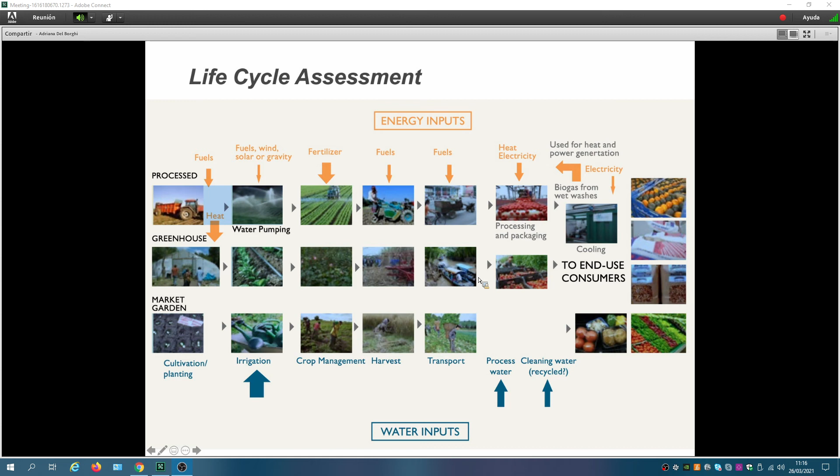So it's a quite wide work performed on the company specifically for these crops. So we performed a wide work, but now the focus was mainly to collect data and to find a way to define just one specific indicator.

So we made a decision and we selected 4 life cycle assessment indicators, impact categories, in order to understand how to normalize and weight them in order to have a unique WEF nexus. So we considered global warming potential, water scarcity measured through the AWARE method, cumulative energy demand, and of course the yield, as the water energy food nexus is related to food.

So the goal of the nexus is to produce food. So we have to produce food. That's why the yield has been considered one of the main results that have to be optimized. So we have to optimize the impact, and we have to optimize the yield as well.

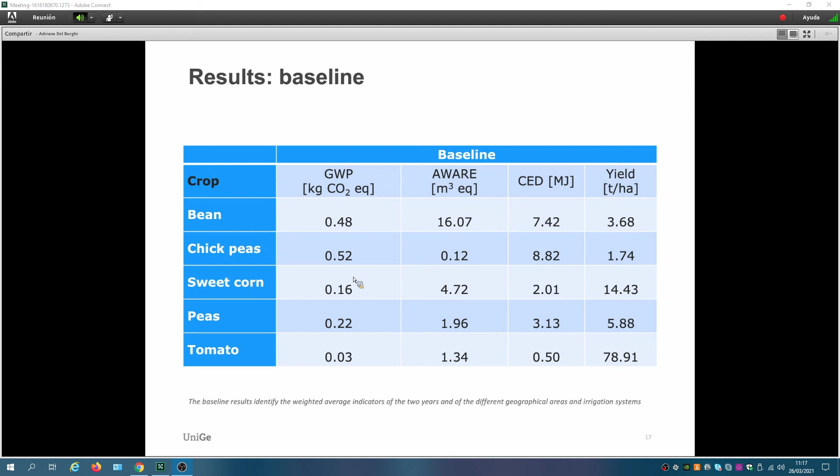Here you'll find the baseline results of the 2-year campaign, specifically for each crop and for each single indicator. This baseline represents the weighted average indicators for all the system boundaries described before. So we considered the weighted average results for each specific irrigation system and geographical area, and this was used to define a way to calculate the unique WEF indicator.

I do not want to bother you with the details of indicator development, but we considered normalization options and weighting options in order to normalize the specific results to the baseline, which was calculated through the data collection and presented in the table of the slides already seen. And we thought about different weighting options.

For example, we thought about 5 options. For example, option 1 sets the same weight for each indicator. You can see you have 25% weighting factors for each indicator.

So weighting the same, we consider that all the indicators are important in the same way. The other options focused on different weighting options. For example, option 2 set the same weight for each environmental indicator, but set 0 for the yield. While option 3 includes 50% for environmental indicators and 50% for yield, options 4 and 5 consider a weight set by the product environmental footprint category rules guidance, in the framework of the product environmental footprint at European level, which suggests specific weights for environmental indicators.

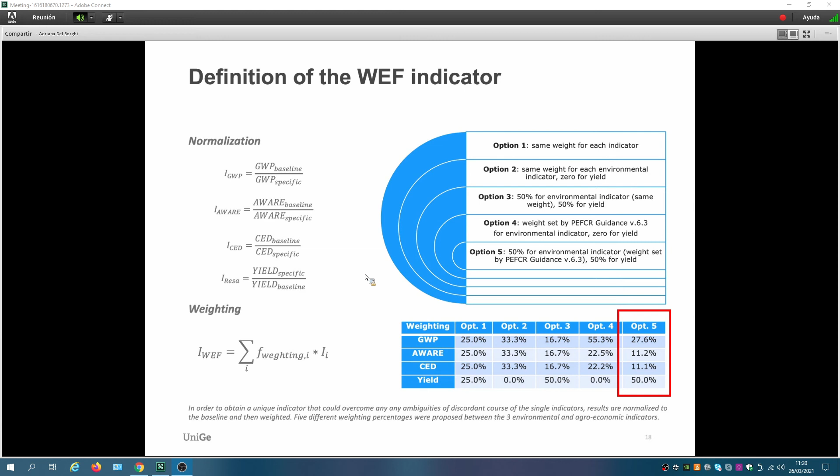In the next slide, we will find that option 5 was considered the best option for weighting. Of course, as this indicator has to be seen from the company's point of view, we have to give a weight to the yield, as they would like to produce food, but we also have to consider the environmental impact. Within this 50% set for environmental indicators, the single specific weights have been set using the weights of the PEFCR guidance.

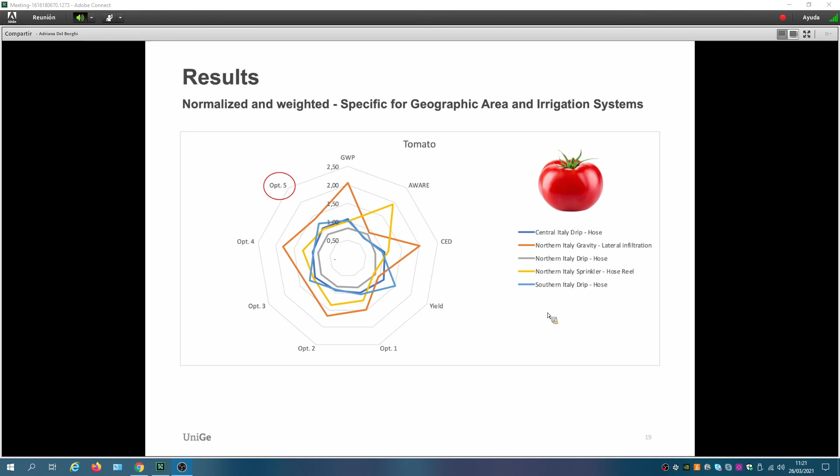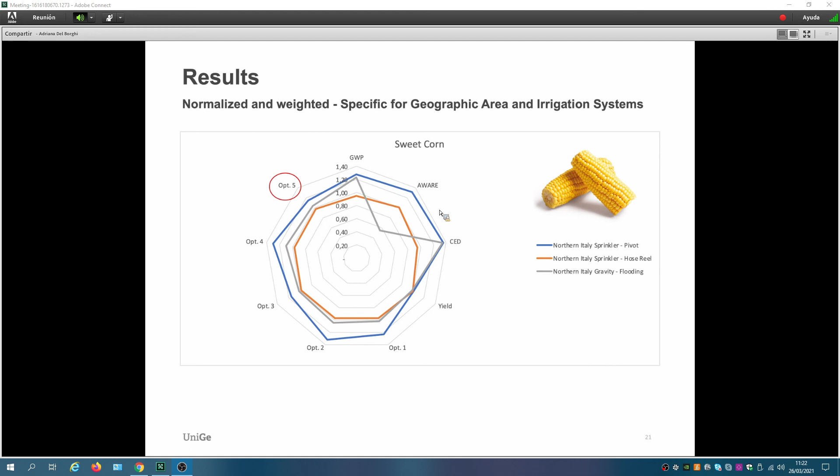So of the several options, option 5 was considered the best. These results were used to define the best options and the best management practices to be proposed to the company. We produced graphs for each selected crop, and later we compared these results in a circular economy perspective, in particular in the eco-design proposal. We try to understand whether the company is working in an optimized way or whether it can make some improvements, for example, switching irrigation techniques in different geographical areas.

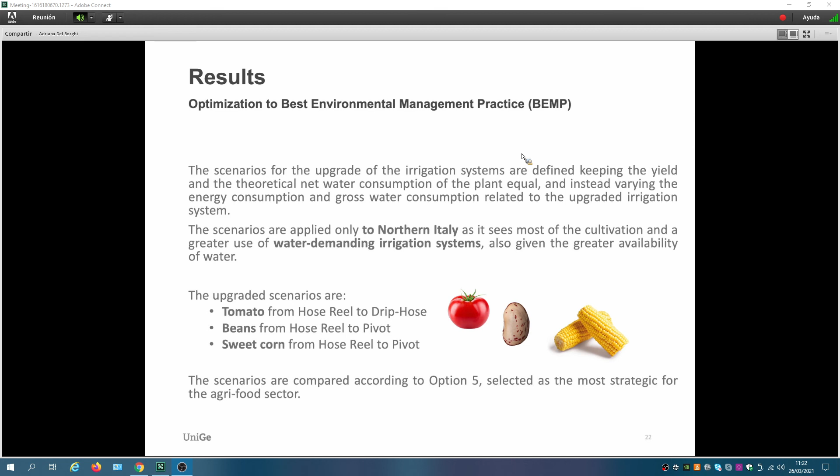For example, tomato. The drip-hose system can be used for tomato, as tomato needs specific irrigation, with precision agriculture techniques in order to optimize water consumption. So we compare different irrigation techniques, and focusing on the score, we'll have an improvement in the score. Please note that this has been set not as an impact but as a score. So with a higher score, we'll have a better environmental performance.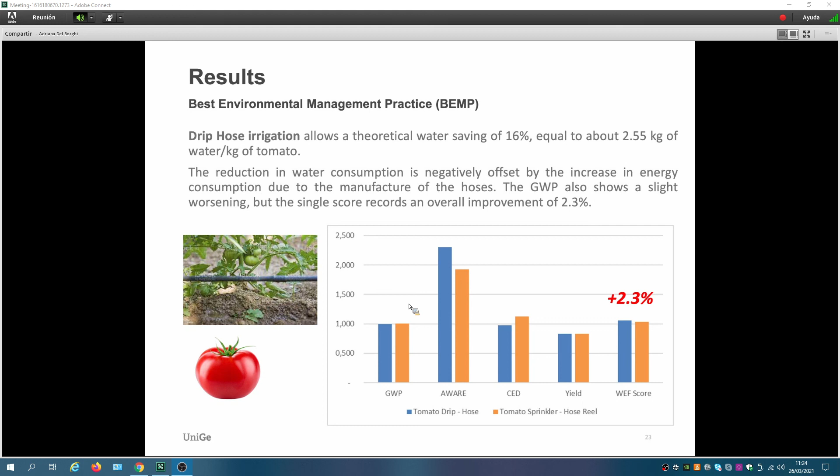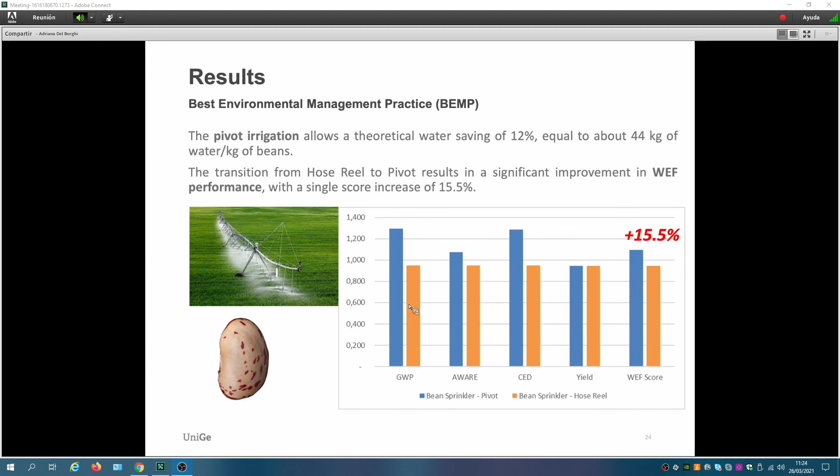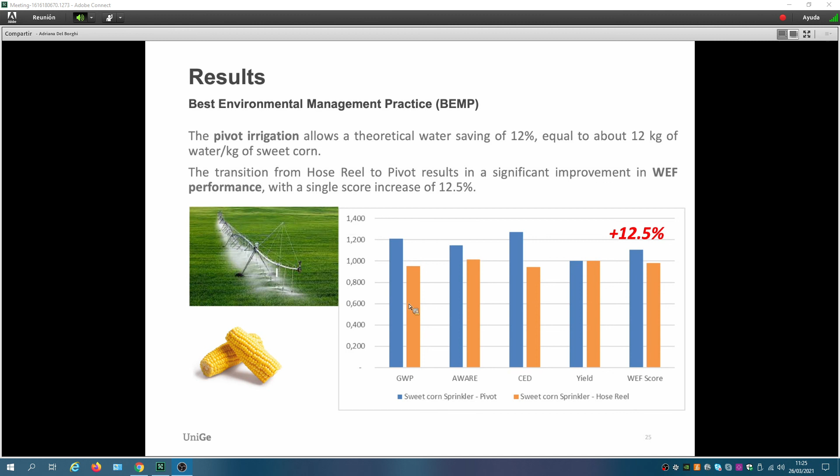So I made this quick presentation in order to show what we're doing at the moment in public-private research studies, so that in a comprehensive way we can help companies understand how they can use research results as decision tools and for planning corporate strategies towards their product sustainability.